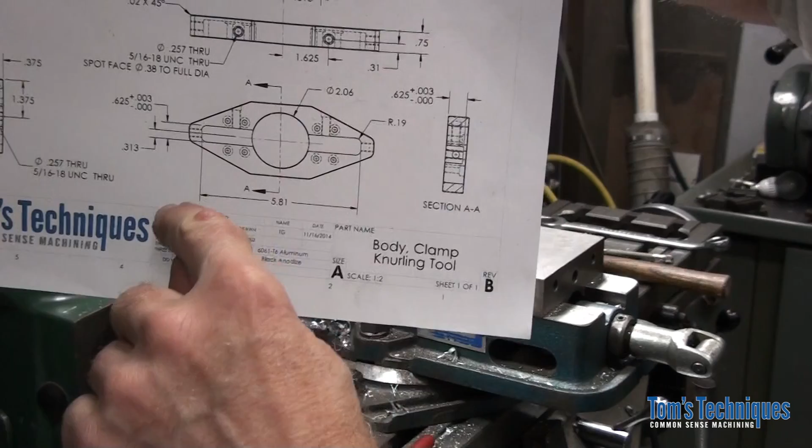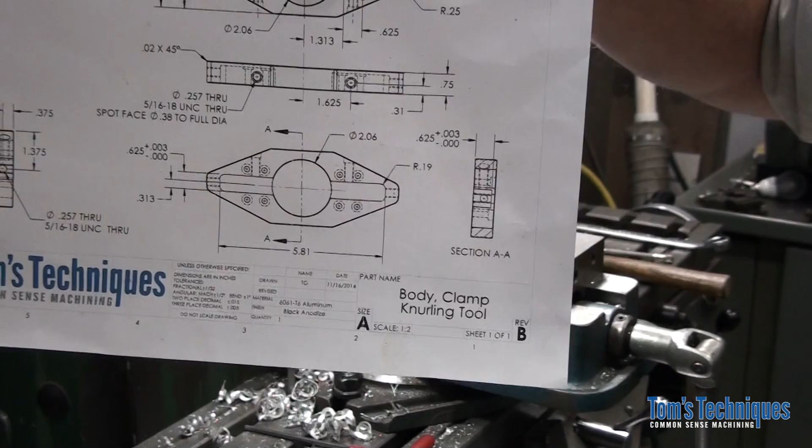The length of the slot is 5.81 inches. Okay, there's those two place decimals again, so that's a real loose tolerance on the length, fairly tight tolerance on the width. Okay, and the depth of the slot is 0.625 plus 3 minus nothing. Okay, so another fairly tight tolerance. That's to clear the length and width of those knurl holders we made last time. All right, earlier.

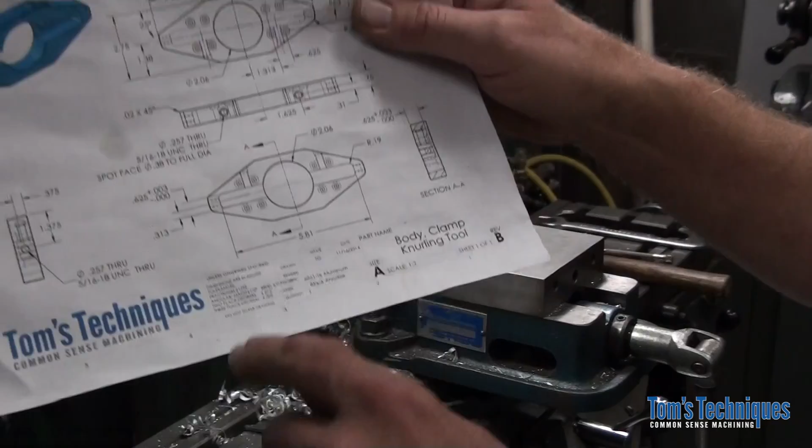So a slot like this is super easy with a digital readout. All you got to do, we're already centered up on the part and the slot, so all we need to do is subtract the diameter of the end mill. In this case, it's a 3/8 diameter end mill because the corner of this slot has a radius of 3/16. If you can see that, there we go. So I'm just using a 3/8 end mill. We'll allow the end mill to generate that corner radius.

So 3/8 end mill. If we're using a DRO or a digital readout, all we do is subtract the 3/8 from the width of the slot and from the length of the slot, divide by 2, then we know how far to travel in all four directions to create that rectangular cutout. Okay, super easy. But if you don't have a DRO, it's a little more involved. Not a lot, but a little bit. So we're going to do it that way today.

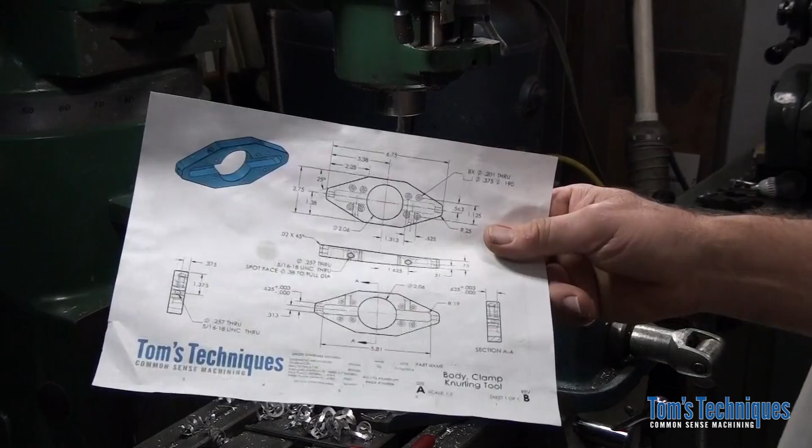Okay, I'm going to use the dials. I don't use dials much anymore, but I know a lot of you guys have mini mills and bench mills and other mills that don't have digital readouts. So we're gonna do this slot today using the dials instead of the DRO.

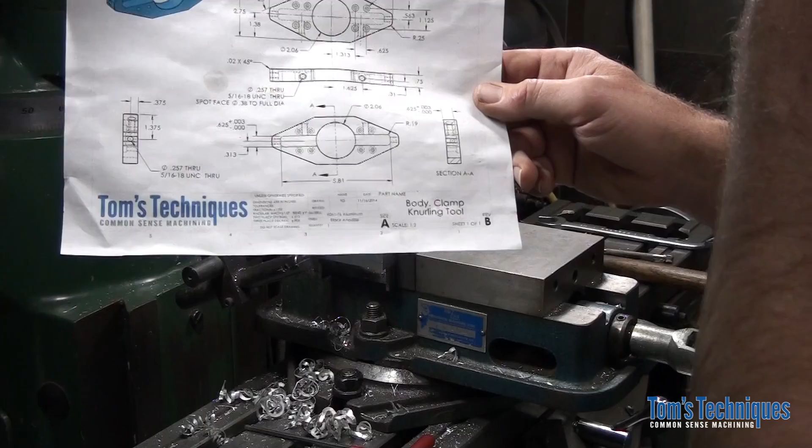So the first thing I think I'm going to do is I'm going to put a mark on each end of this slot. It's 5.81 inches long. So I'm just going to figure out what the distance from the end of the part is to each end of the slot, put a scribe mark, and that's going to be the visual end of our slot. Like I said, this is a two-place decimal. It's not critical. You can easily mill to a line, and that's what we're going to do.

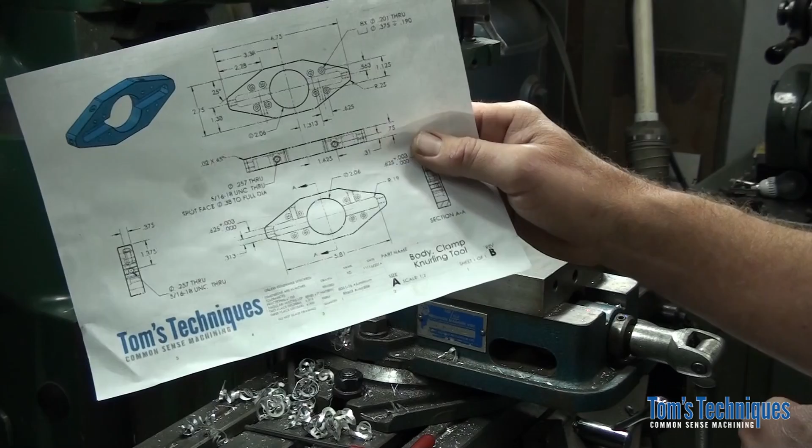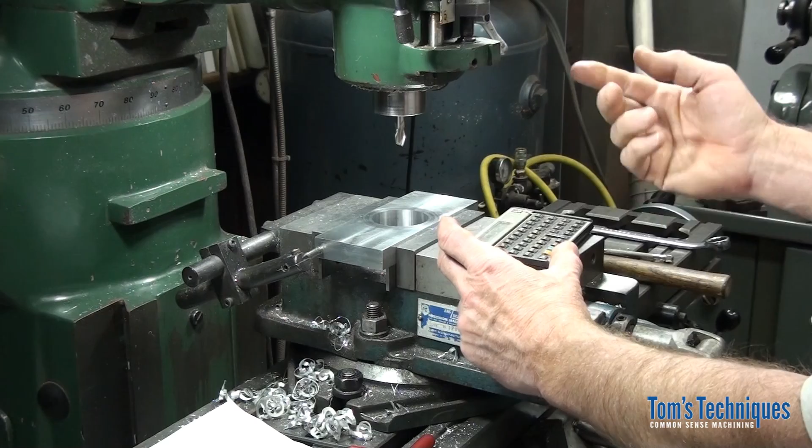So let's do a little calculation here. The part is 6.75 inches long, and the slot is 5.81 inches long. So subtract that. Okay, divide by 2. Tells me that the ends of the slot are 0.47 inches from each end of the part.

So let's just take digital calipers here, set it for 0.47 inches, right about there, lock it down, and I'll just put a scribe mark at each end of the slot where the slot's going to be, just as kind of a guide to tell me where to stop. You can either use that and visually stop, or you can just mill to it and set the dial on your machine.

Your table has 2 dials, right? So we can mill down to one end of the slot up to the scribe line, set one dial to 0, mill to the other end, set the other dial to 0, then you know exactly where to stop. Quick and dirty. Nothing fancy on the length.

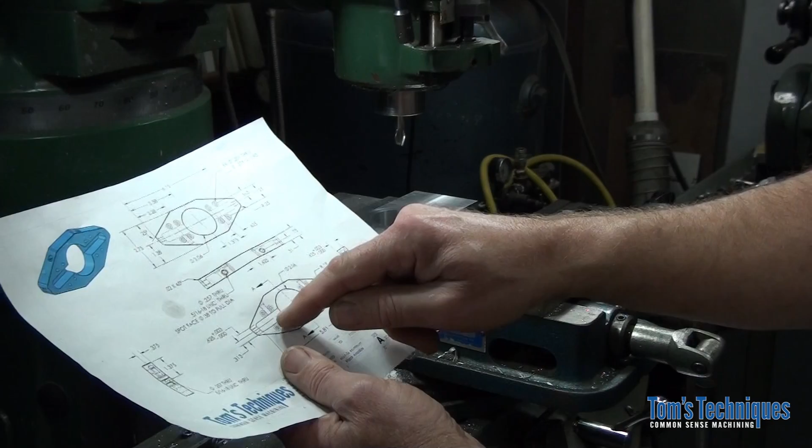For the width, since we're not using a digital readout, we have backlash to deal with. So what we're going to do is we're going to mill one edge of the slot to size. Okay, this front edge, I'm going to mill it to its finished position. Actually finish it right up. Okay, and then once we get that surface milled, we can use gauge blocks to check and get the width of the slot right, milling the other side. Okay. So we're going to start out, we'll mill the 2 ends and mill the front edge of the slot to finish size.

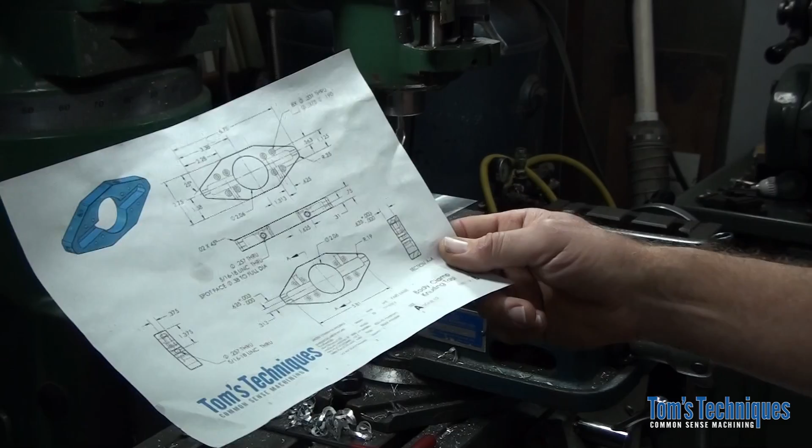So the first thing I'm going to do is I'm going to rough this slot out, okay? We're already centered up on our part, so let's set the y-axis to 0 and lock the table down. We're just going to be taking one pass right down the middle with this 3/8 end mill just to give us a start on the slot. We'll take that down to almost to depth, maybe 10 thousandths shy of the depth. Okay, we're centered up on the part. Let me go turn the power on.

Okay, now we need to pick up the top surface of the part. So what I'm going to do is I'm going to run my end mill down just above the top, set the stop, run it down hard against the stop, and lock it down. Okay, so that end mill's against the stop now. Now I'm going to move over. Let's get our RPM bumped up a bit here.

Okay, now I'm going to bring my table up until the end mill scratches the surface. And we'll just kind of come down a little bit at a time until it just scratches, and I'm going to set my dial to 0 on the table. That's our reference for Z.

So now we can come down, we can plunge cut if we want, or we can come down a little bit at a time and just rough this slot out. Let's move over to our scribe line on this left side here. Over about there. Okay, I'm going to set one dial to 0. And you guys probably can't see much. Let me zoom in a bit here.

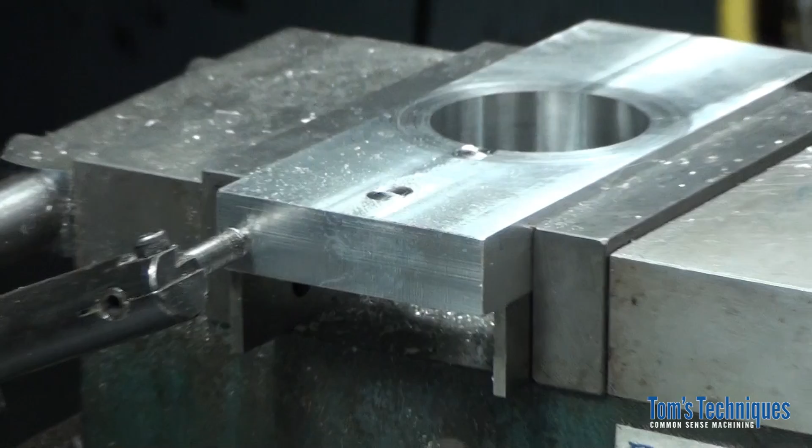There we go. As you can see, I came over and up to that scribe line and set my dial to 0. Let's go down the other end and do the same thing. I'm just visually picking up that line. Remember, the length's not that critical, so we'll just go up till it just breaks the line. Then I go set the other dial to 0. So that establishes each end of the slot.

Okay, now let's move the table up. The depth of the slot's 0.625 plus 3 minus nothing. Let's go up about 595, or no, about 615, about 10 thousandths. Leave about 10 thousandths for a finished cut. 1, 2, 3, 4, 5, 6. 15, okay. We'll leave a little bit of meat to clean up for a finished cut.

Now make sure your y-axis is locked down. I'm going to plunge cut this out. I like plunge cutting. It's actually faster and easier on the tool than side milling for roughing out. Moving over about maybe a quarter the diameter of the end mill.

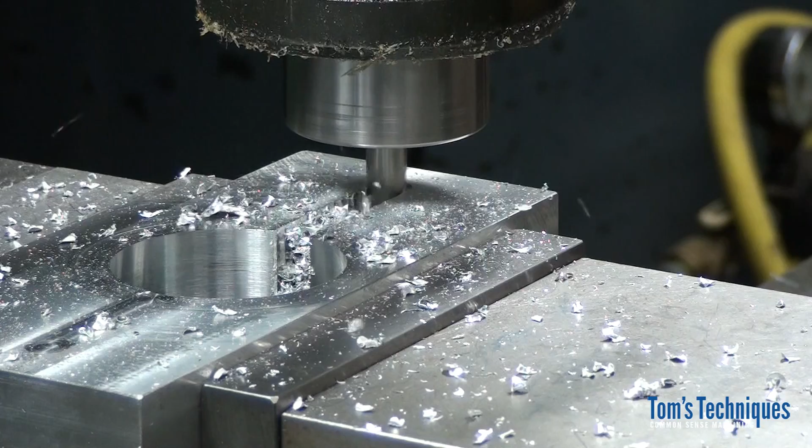You can remove a lot of metal in a hurry, and it's easy on the end mill, and it doesn't tend to plug up the flutes like it does side milling. Especially in gummy material like aluminum. I'm doing this dry, and there's still no problem with chips sticking to the end mill. Alright, let's go do the same thing to the other side.

It's about 100 thousandths per cut. Get much more than that and it slows down. Get much less than that and you're just wasting time. So you can tell when the end mill's happy, cut nice and easy.

So now we need to figure out what this dimension needs to be. Let's just look at the drawing. The width of the part's 2 3/4 of an inch. Let me back up here a little bit. Whoop. Okay, the width of the part's 2 3/4. Width of the slot is 5/8, 0.625. Divide by 2. Okay, the slot should be 1.0625 from the edge of the part. Let's see what it is here.

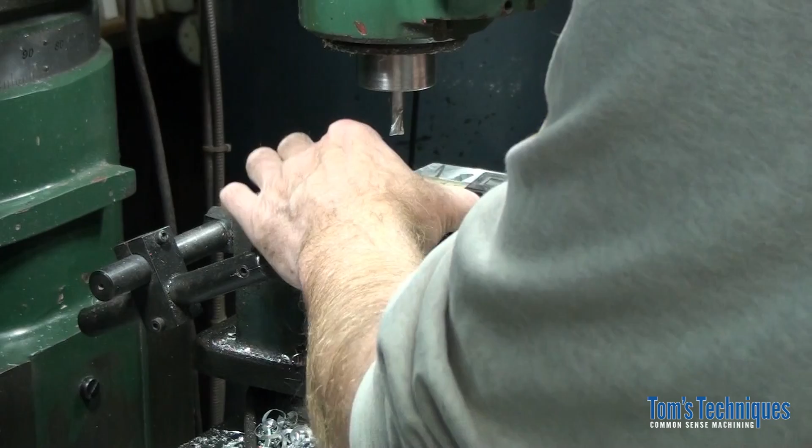This dimension is not super critical, okay? It's a 3-place dimension. If you look on the print, we have plus or minus 5 thousandths of an inch tolerance on a 3-place dimension. So what we have now is 1.173. 1.173. So we got 110 thousandths to go. Remember I said we had about 3/16, about 188 thousandths, so we got 110 left.

So let's go. What I'm going to do now is since I like working to 0 on my dials, I'm going to offset my dial 110 thousandths. Counterclockwise in this case, so as I keep feeding in, when I end up at 0, the slot will be finished. The edge of the slot will be located. So let's go ahead and take all but about 10 thousandths of that off, and then double check our dimension and see where we're at.

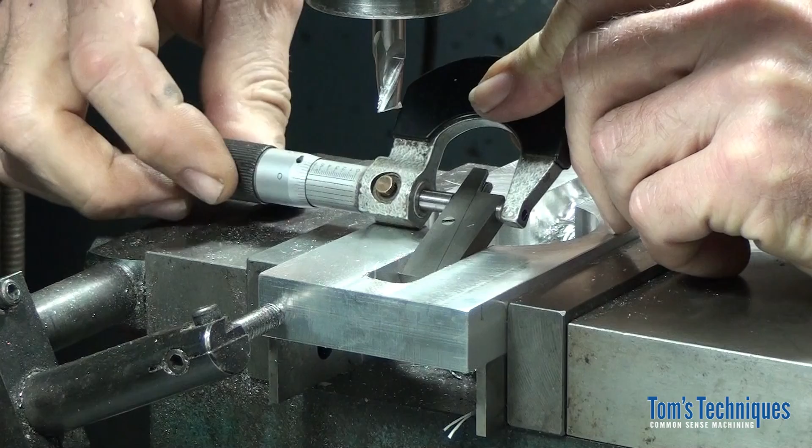Okay, what I have here is an adjustable parallel. This is really handy for measuring the width of slots. All it is is just a sliding parallel. This one goes from 1/2 inch to about 11/16, so our 5/8 slot's right in the middle of its travel. So all you do with these things, slide them over to one side so they're smaller than what you want to measure, and then put them in the slot and open them up, slide them until they grip the slot like that, okay? Then you can just measure the adjustable parallel and it'll tell you how wide the slot is. It's another form of transfer measuring device like the telescoping gauge.

Okay, so what we have, the slot is 623.5. So we have 1 and a half to 4.5 thousandths to go. Remember we have a plus 3 minus nothing tolerance. So let's split the difference. Let's go about 3 thousandths. That'll put us right in the middle of our tolerance.

So let's move down to the other end of the slot. There. Go down to depth. And move over 3 thousandths. And this will be our finished cut. But then I like to do spring passes, so we'll take at least a spring pass or two. Taking another cut without changing any settings. Get all the spring out of the end mill. Same thing on this end.

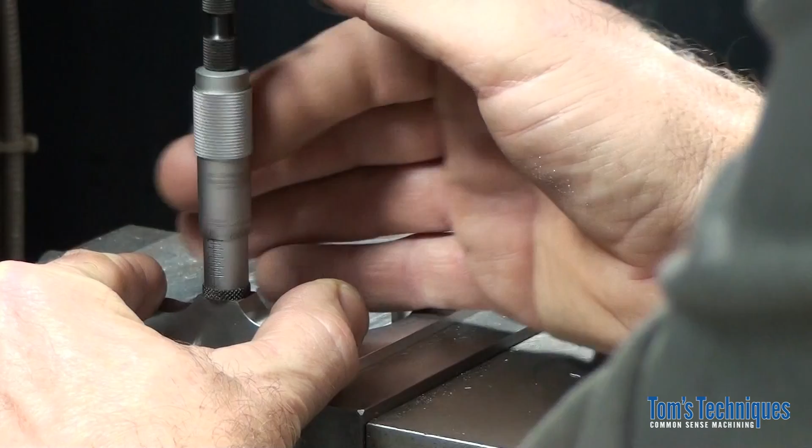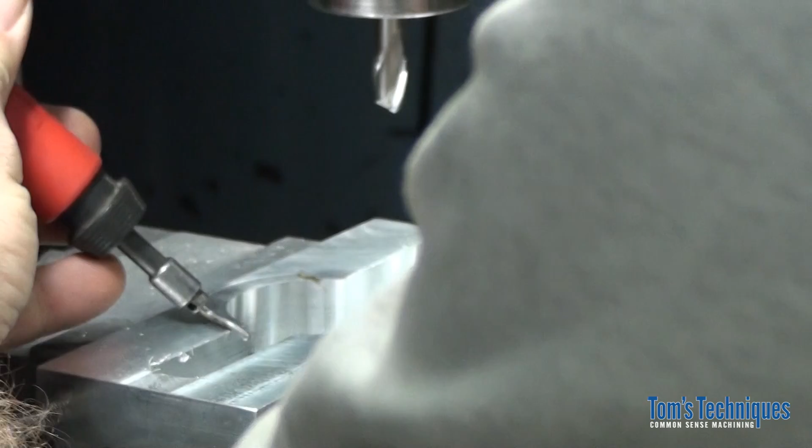And for measuring the depth of a slot, there's nothing better than a depth micrometer, okay? Let's see where we're at. Try to make sure all the burrs are off the edge of that thing first. Okay. Make sure all the chips are out of the way. You have to be careful reading depth micrometers because the numbers on the barrel are backwards from a micrometer. On these, you measure from right to left. Okay, I don't know if you can see that.

Okay, so what we have here is about 619 and a half. Everything's backwards. Alright, 619 and a half. Okay, so we have about 5.5 thousandths to go to the minimum dimension, plus 3 minus nothing. So let's go about 7 thousandths deeper. Okay, that'll put us right in the middle of our tolerance. Raise the table 7 thousandths. Go to the end of our slot.

Back side, and then we'll clean up the ends as well. So we've lost our location for the front of the slot. So since we're just cleaning up the bottom, what I usually do is just put a couple marks on it. Then we can refine the location with those marks. Don't even go all the way down, just move it over till you scratch the side a little bit. Take those marks off. Right there, make a note on the dial as to where you are. Let's see, we're about 67 thousandths.

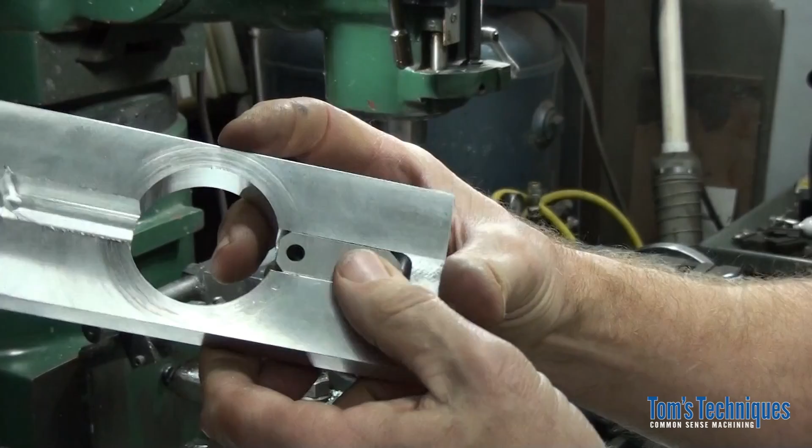Okay, I guess just for grins, we had to see if we did this all right. So we had to try it with our knurl holders we made earlier. Let's make sure everything goes together. Okay, goes in the slot. That's a good sign. Feels like there's a little bit of a step here. That's a good sign. I think we're good to go.